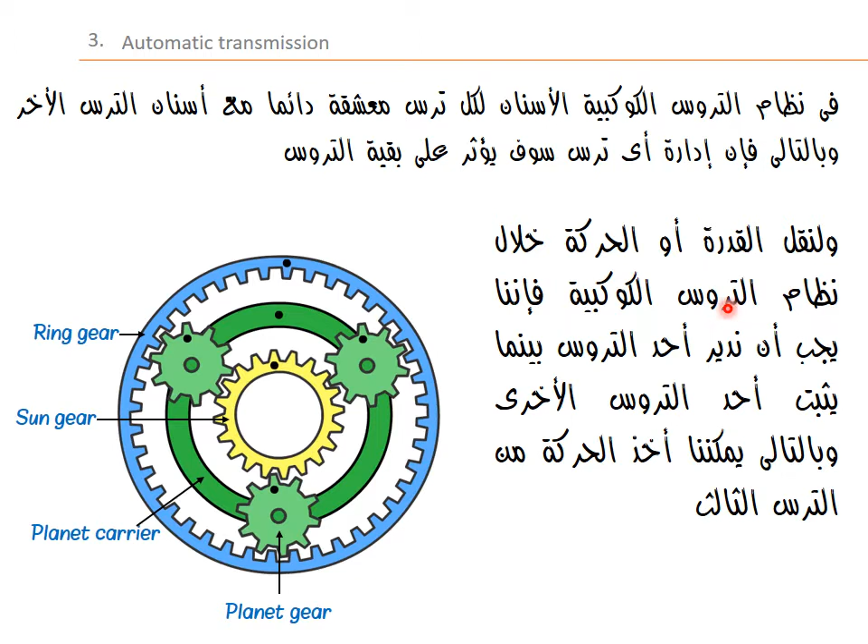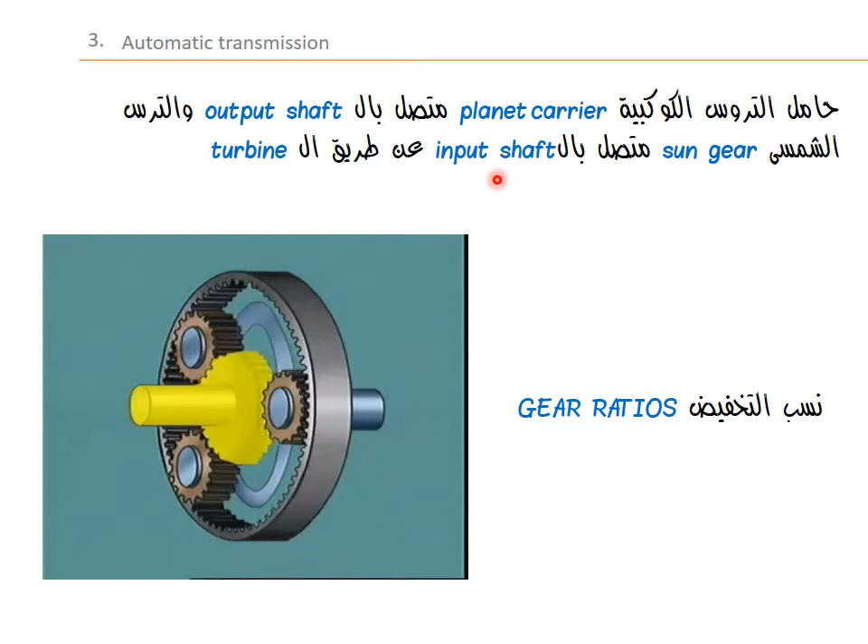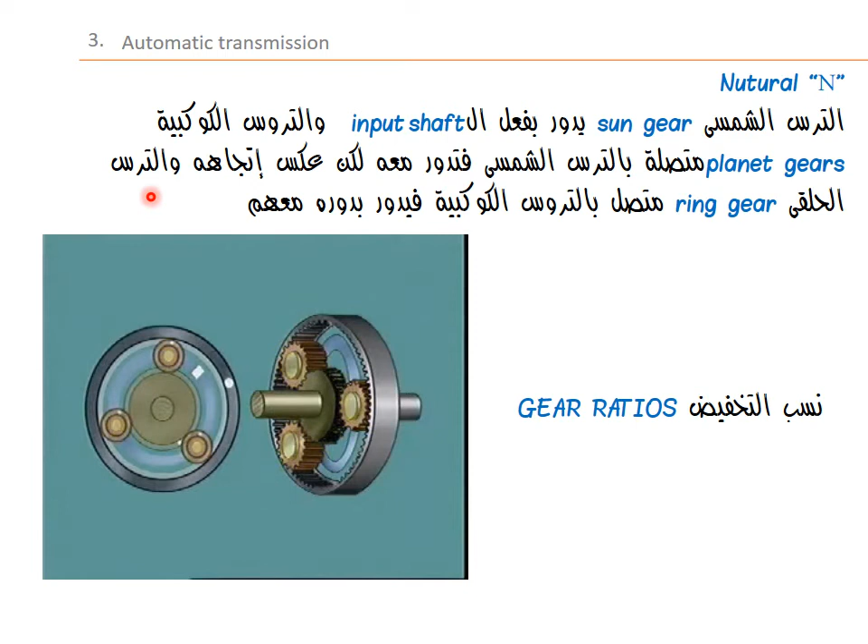This planet carrier is attached to the output shaft. The sun gear is attached to the input shaft from the turbine. The ring gear is not held. When the input shaft rotates the sun gear, the planet gears idle on their stationary carrier pins and turn the ring gear in the opposite direction to engine rotation. This free rotation of the gears provides neutral. No drive is transmitted to the output.

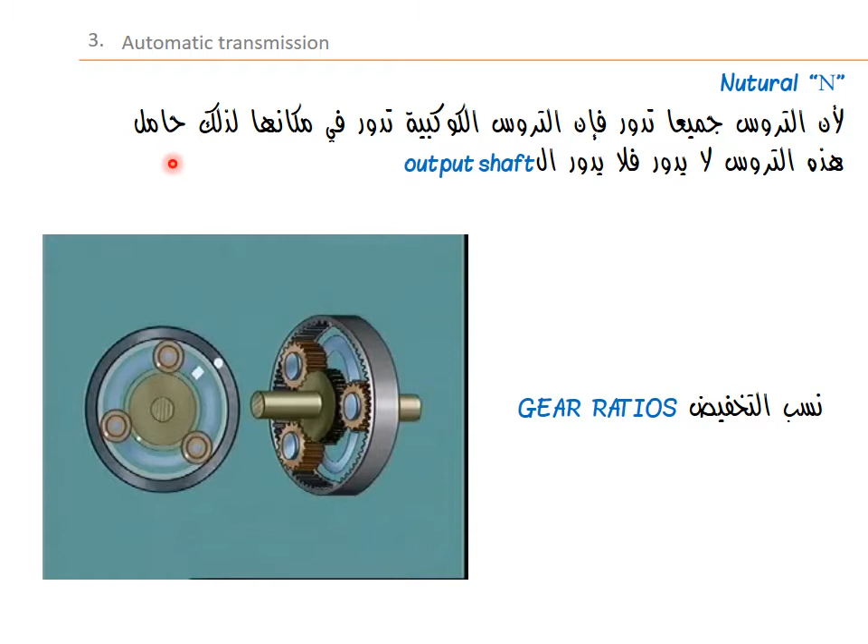For low gear, a brake band anchored to the transmission case is placed around the ring gear. Applying this holds the ring gear stationary. Now when the sun gear rotates, the planet gears can no longer idle. They must walk around the inside of the stationary ring gear. The planet carrier must move with them in the same direction as engine rotation, but at a slower speed and with an increase in torque.

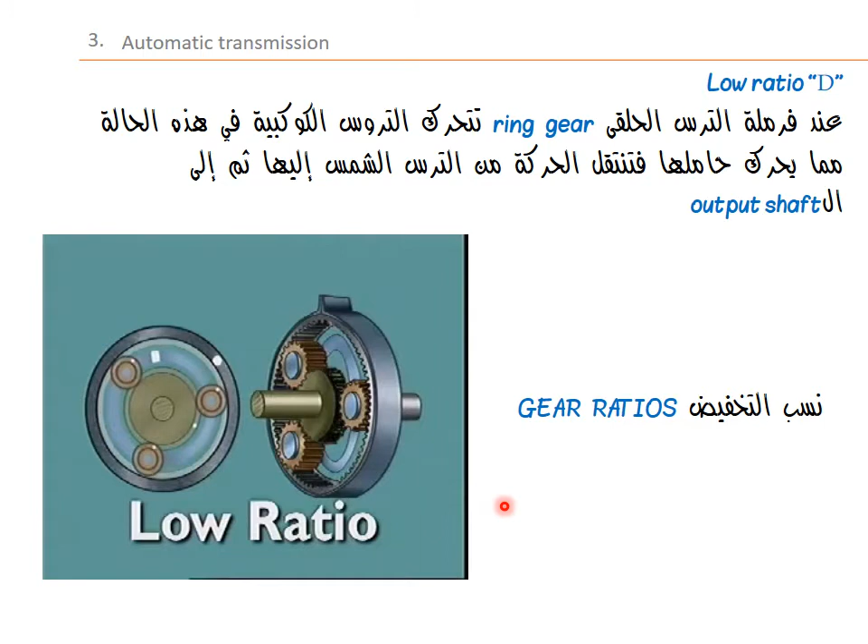A direct drive or top gear condition with a 1-to-1 ratio is obtained by locking together any two members of the gear set. A multi-plate clutch can be used for this purpose. The outer drum and outer plates are attached to the ring gear. The inner plates and inner drum are attached to the planet carrier. When fluid under pressure is directed onto the clutch piston, the clutch plates are locked together. This locks the planet carrier to the ring gear.

Now when the sun gear is rotated, the planet gears can neither idle nor walk. The whole gear set turns as one unit to give a direct drive.

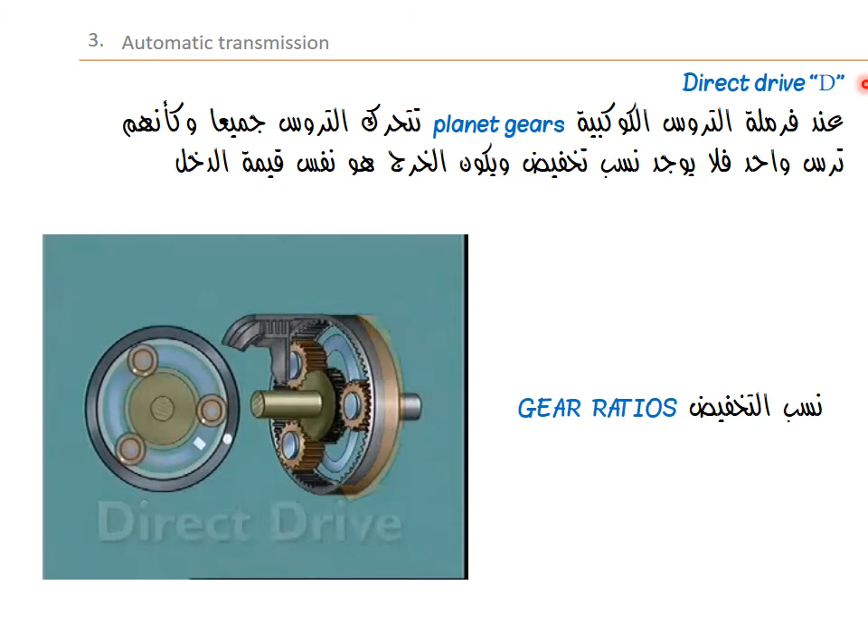For reverse, the ring gear is attached to the output shaft, and the planet carrier is held stationary by a brake band. Rotating the sun gear causes the planet gears to idle on their stationary pins. This turns the ring gear and its output shaft in the opposite direction to engine rotation.